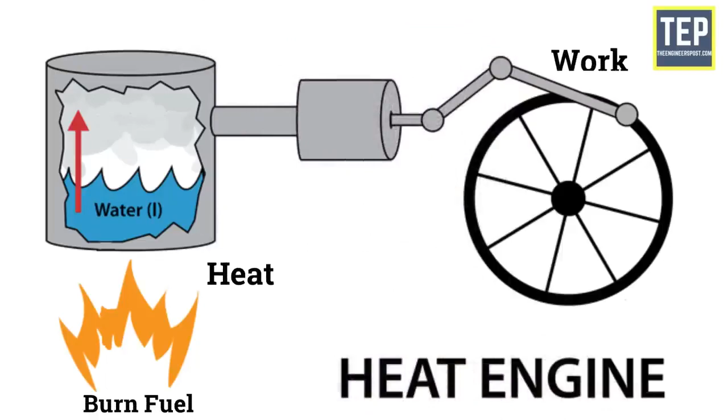An engine is a machine designed to convert one form of energy into mechanical energy. Heat engines burn fuel to create heat, which is then used to do work. It is a complex machine built to convert heat from burning gas into the force that turns the wheels.

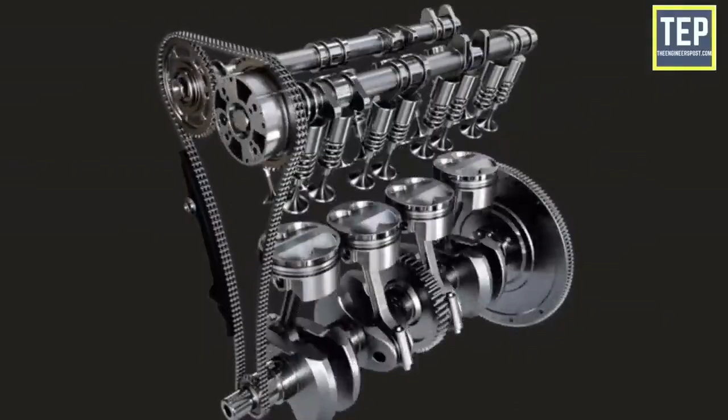The chain of reactions that achieve that objective is set in motion by a spark, which ignites a mixture of petrol vapor and compressed air inside a momentarily sealed cylinder and causes it to burn rapidly.

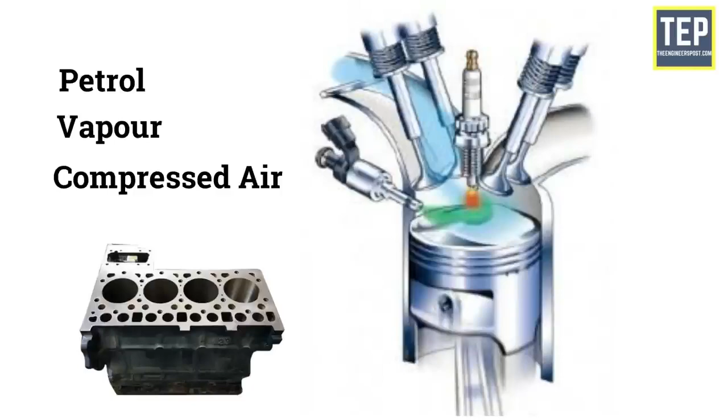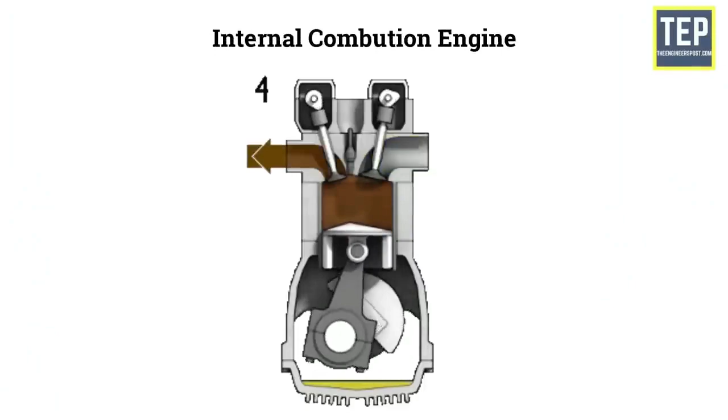The engine has two types: one is the internal combustion engine, and another is the external combustion engine. The internal combustion engine is a heat engine that burns its fuel inside the engine cylinder. External combustion engines are heat engines that burn their fuel outside the cylinder.

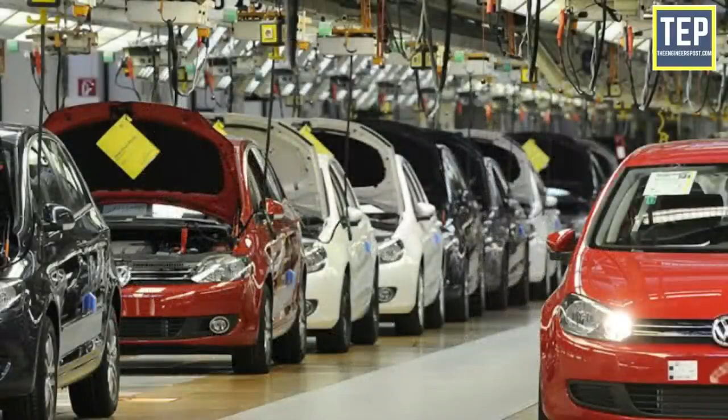The engine is one of the most essential parts of the automobile industry, or we can also say that the engine is the heart of an automobile.

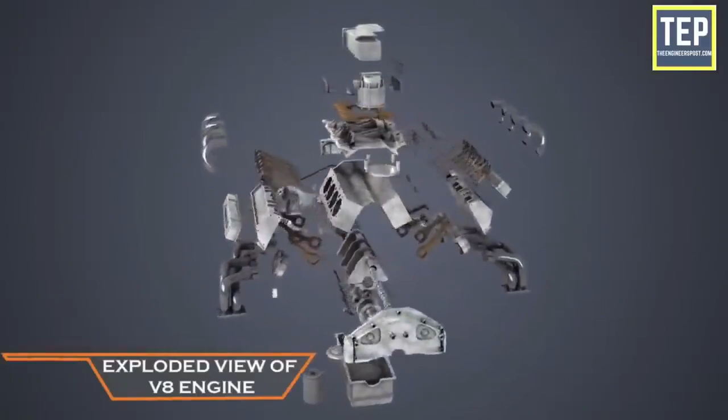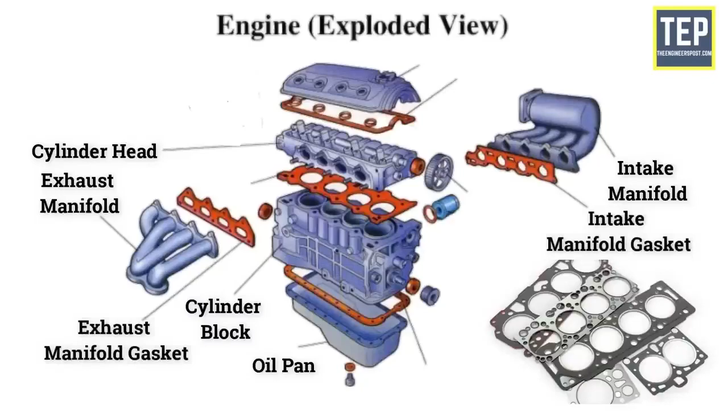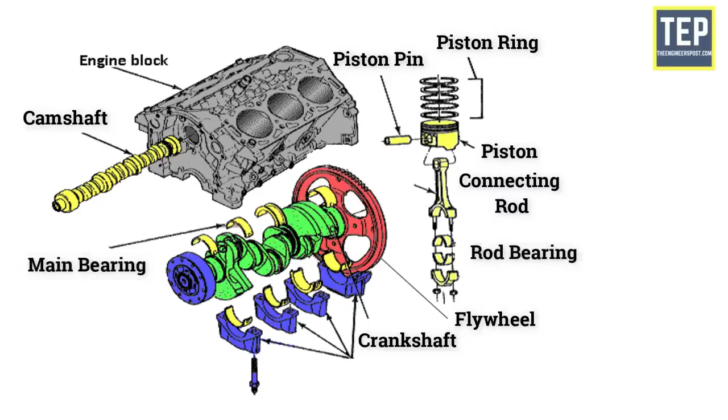The main parts of a car engine are cylinder block, cylinder head, oil pan, manifolds, gasket, and piston. A piston ring, piston pin, connecting rod, crankshaft, camshaft, flywheels, rod bearing, main bearings, and bearing caps.

Now let's take a look at each of the engine parts in detail, starting with the cylinder block. It is the basic framework for the engine and one of the main parts of an engine. A cylinder block consists of three parts: the cylinder in which the piston slides up and down, the port or opening for the valves, and the passages for the flow of cooling water.

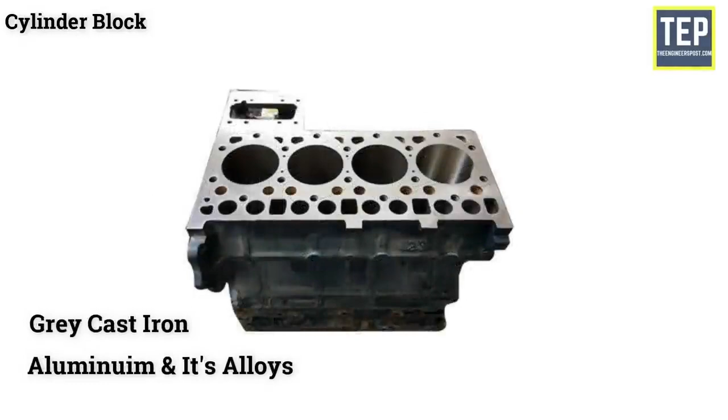The cylinder block is usually made of gray cast iron or aluminium and its alloys, while the crankcase is fixed to its bottom. Apart from these, other parts like timing gear, water pump, ignition distributor, flywheel, and fuel pump are also attached to it.

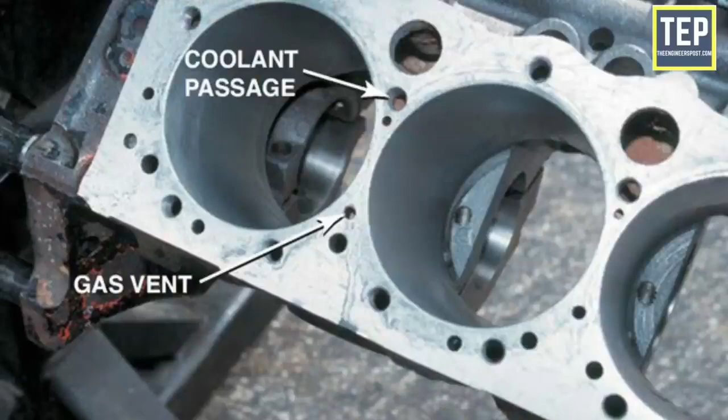Coolant passages are provided in the cylinder walls for the circulation of cooling water. The cylinder block also carries lubrication oil to various components through drilled passages that are called oil galleries.

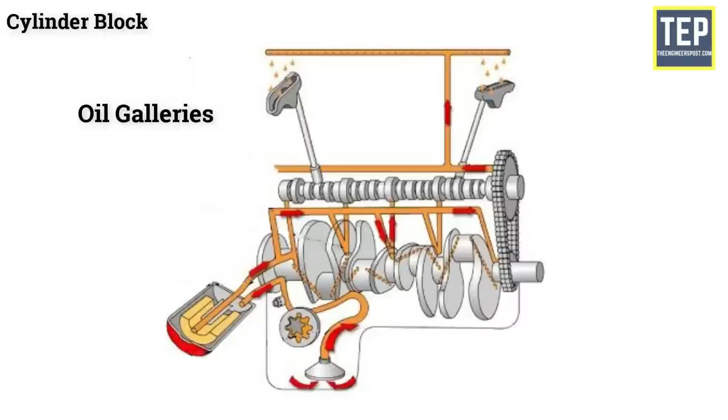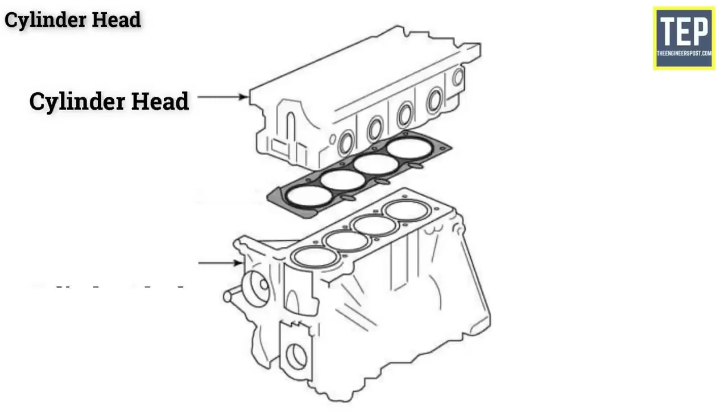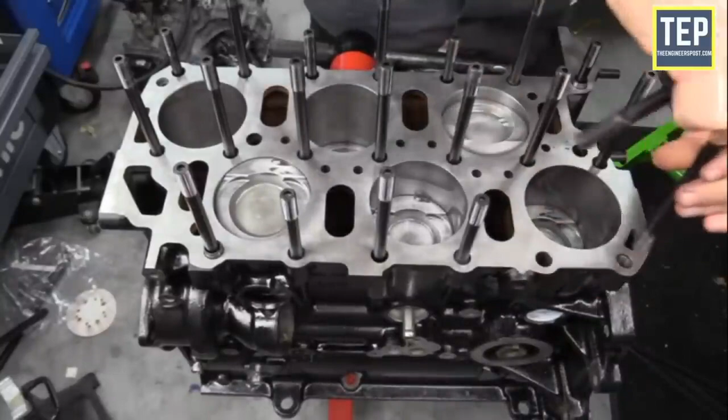The cylinder head is attached to the cylinder block using studs fixed to the block, with gaskets used to provide a tight leak-proof joint between the head and block.

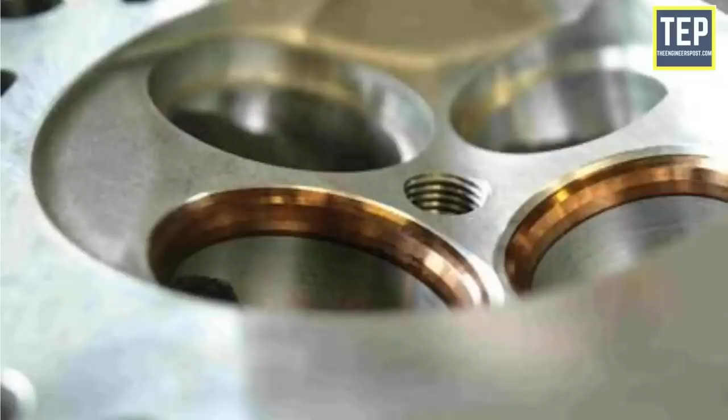The cylinder head contains a combustion chamber above each cylinder, and it also contains valve guides, valve seats, ports, coolant jackets, and threaded holes for spark plugs. It incorporates passages for the flow of cooling water.

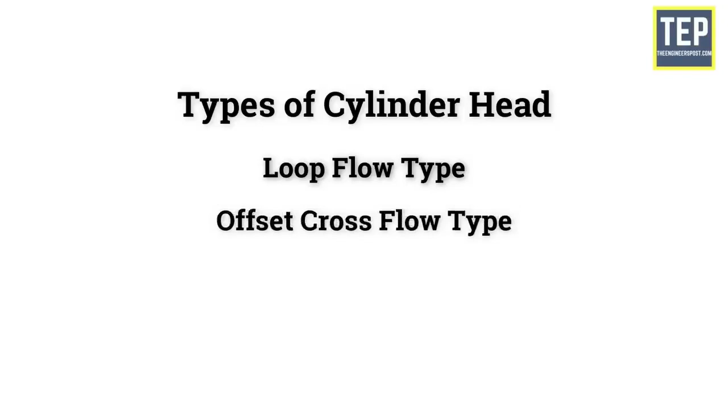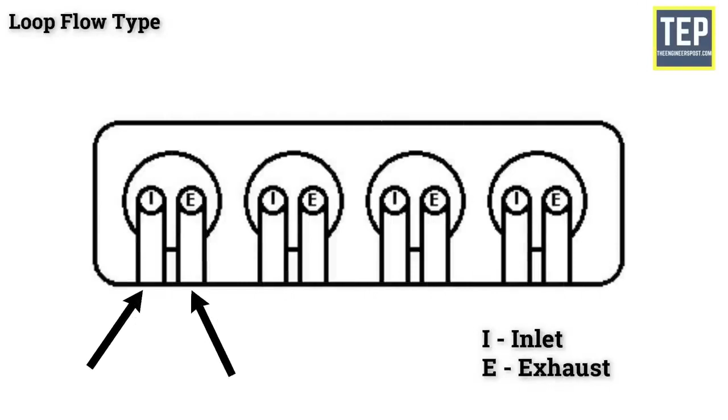There are three different types of cylinder head available, depending upon the valve and port layout: loop flow type, offset cross flow type, and inline cross flow type. In the loop flow type, the inlet and exhaust manifolds are on the same side, which facilitates preheating of the intake air. In the offset cross flow type, the inlet and exhaust manifolds are placed on different sides of the cylinder head.

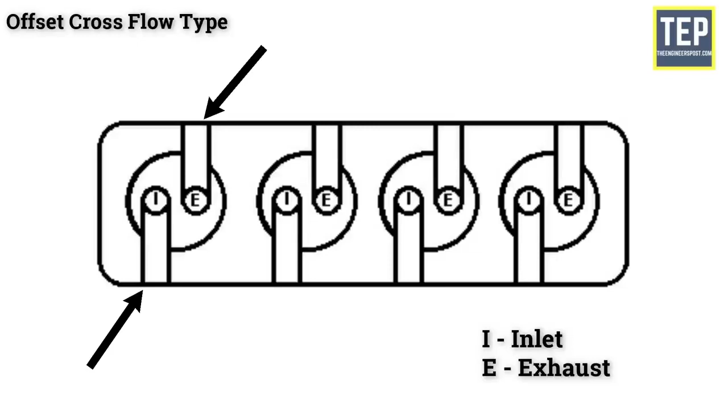In the inline cross-flow type, the valves are positioned transversely and usually inclined to each other, while the inlet and exhaust manifolds are on different sides of the cylinder head. This arrangement gives better performance, but it is costlier.

Crankcase. The oil pan and the lower part of the cylinder block together are called the crankcase. It is the bottom portion of the cylinder block in which the crankshaft is fitted.

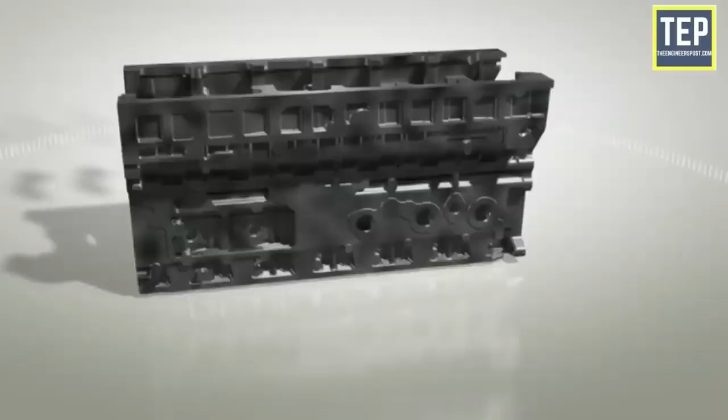This is a rigid construction made of gray cast iron or aluminium. It can either be cast integrally with the block, or cast separately and attached to the block with bolts. The crankcase is shaped simply like a box, having no bottom surface.

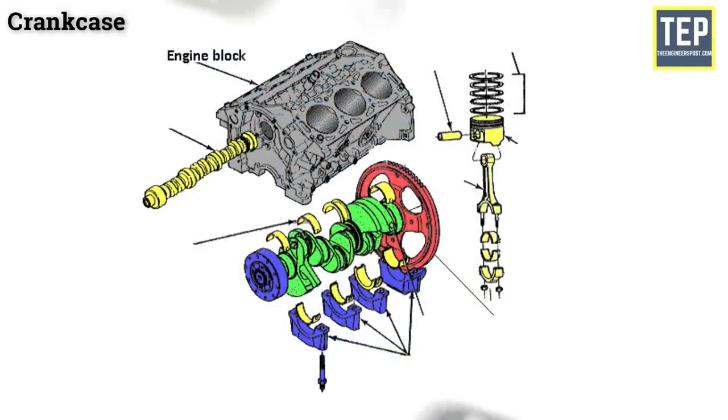The function of the crankcase is to provide support for the main journals and bearings of the crankshaft, rigidly maintaining the alignment of their axes of rotation under various engine loads.

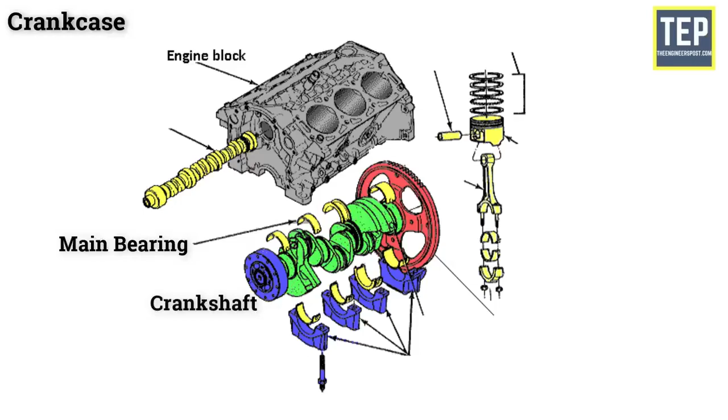Oil pan. The bottom half of the crankcase is called the oil pan or sump. It is attached to the crankcase through set screws and with a gasket to make the joint leak-proof.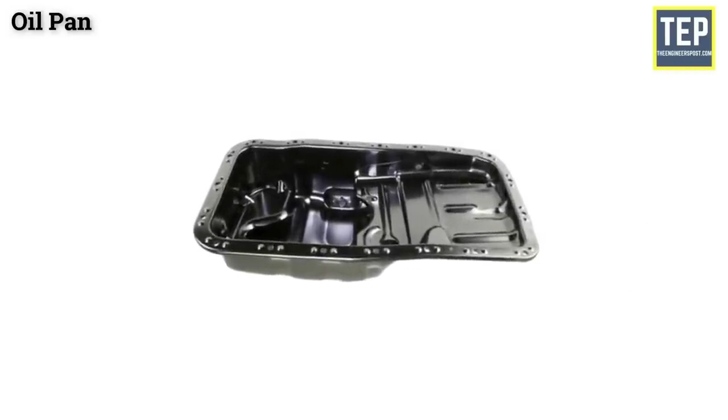The oil pan serves as a reservoir for the storage, cooling, and ventilation of engine lubricating oil. At the bottom of the oil sump, a drain plug is provided to drain out the dirty oil at the time of oil replacement. Generally, the sump is made of pressed steel sheet, or aluminium alloy casting is also used.

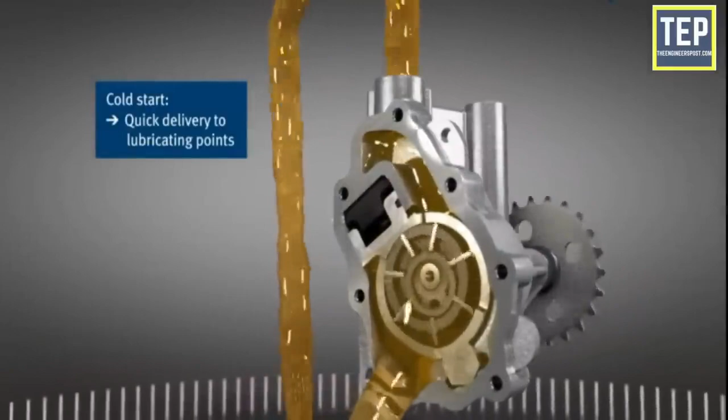The oil pump in the lubricating system draws oil from the oil pan and sends it to all working parts in the engine. The oil drains off and runs down into the pan. Thus, there is a constant circulation of oil between the pan and the working parts of the engine.

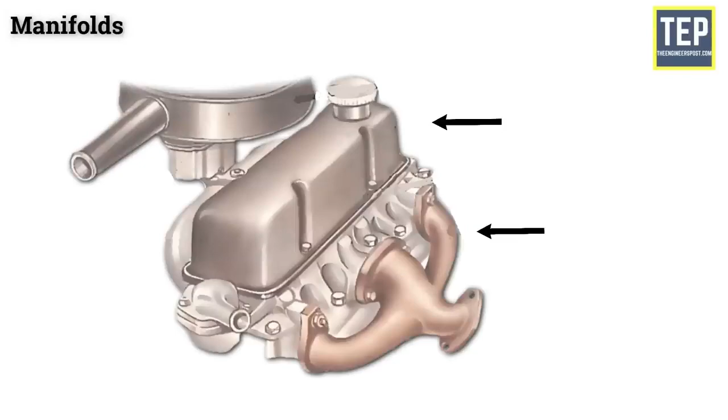Manifolds. There are separate sets of pipes attached to the cylinder head, which carries the air-fuel mixture and the exhaust gases. These are called manifolds. It is generally made of cast iron, so that it can withstand the high temperature of the exhaust gases.

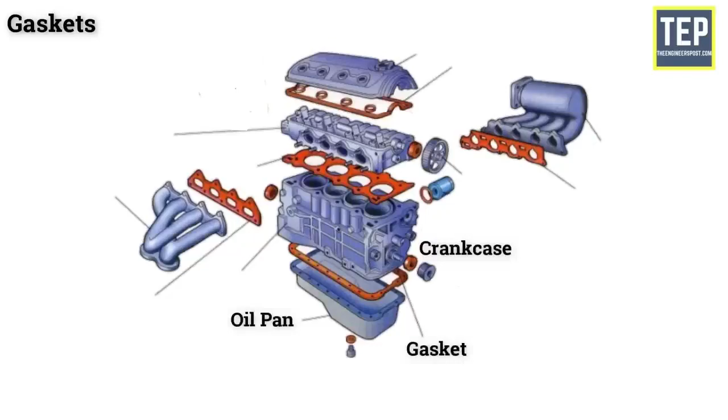Gaskets. Gaskets are used to provide a tight-fitting joint between two surfaces. Gaskets are found in the joint between the cylinder head and the cylinder block, between the crankcase and oil pan, and in between the cylinder block and manifold. Materials used for gaskets are cork, asbestos, rubber.

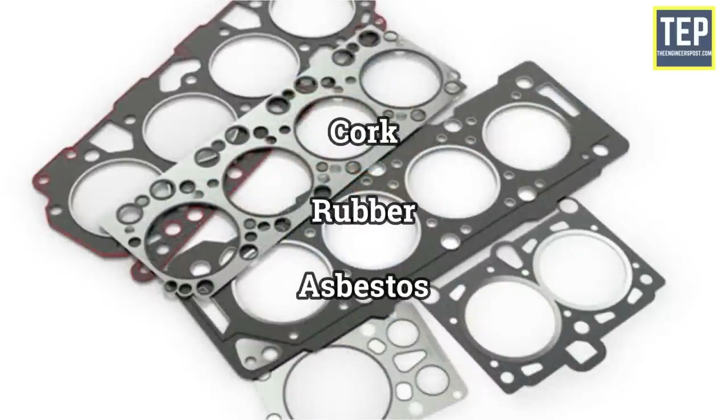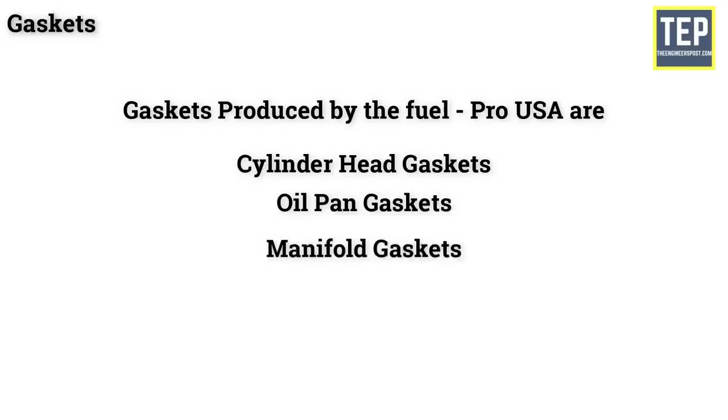Gaskets produced by the Fuel Pro USA are cylinder head gaskets, oil pan gaskets, manifold gaskets, and pump gaskets.

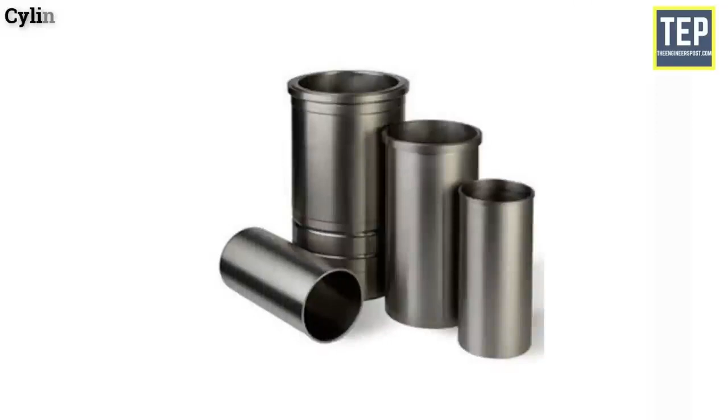Cylinder liners. The cylindrical shape liners are used to avoid the cylinder wear. It is one of the most important functional parts that make up the interior of an engine. Cylinder liners can be replaced after they are worn out.

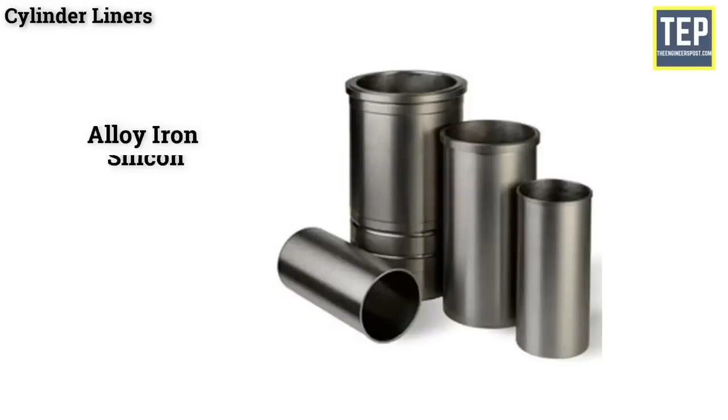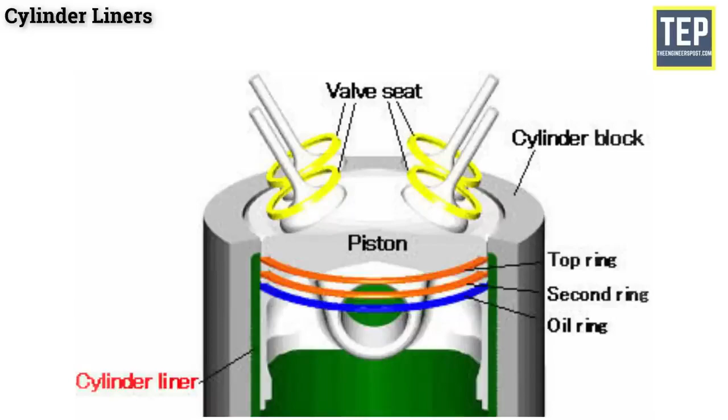These are made of special alloy iron, containing silicon, manganese, nickel, and chromium. Usually these are cast centrifugally. These liners resist wear and corrosion, and are the oil hardening type that offers considerably longer life for the engine. There are two types of cylinder liners available.

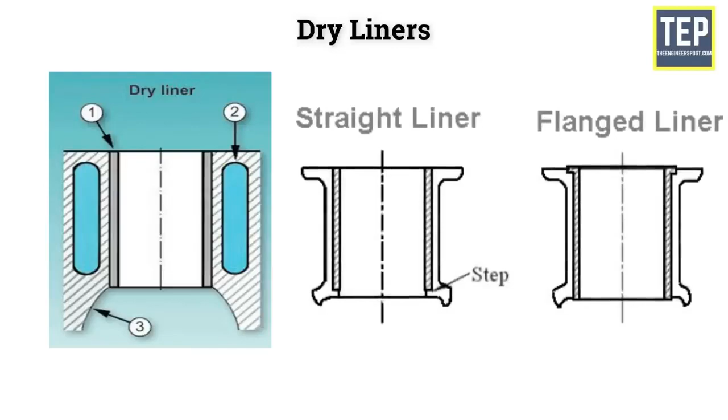They are dry liners and wet liners. Dry liner is made in the shape of a barrel with a flange at the top, which keeps it in position. The entire outer surface bears against the cylinder block casting, and hence, these are machined accurately at both outer and inner faces.

Wet liners will be in direct contact with the cooling water at their outer face. Because of this, these liners need not be machined very accurately at the outer surface. However, they have been machined accurately at the inner surface.

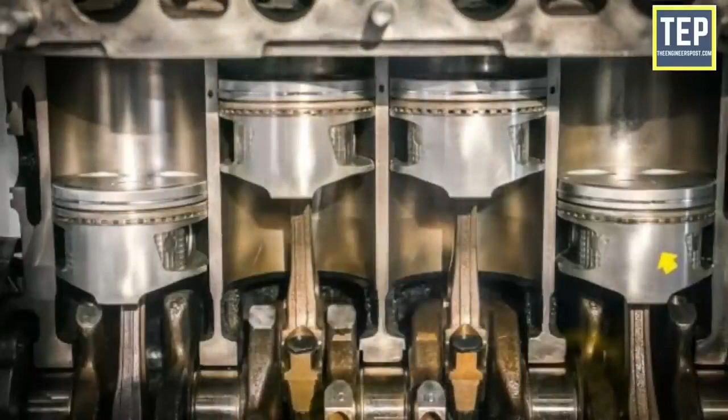Pistons. These are the most important engine parts compared to others. The piston is a cylindrical plug that moves up and down in the cylinder. It helps to convert pressure energy, obtained by the combustion of fuel, into useful mechanical power, and it transfers this power to the crankshaft through the connecting rod.

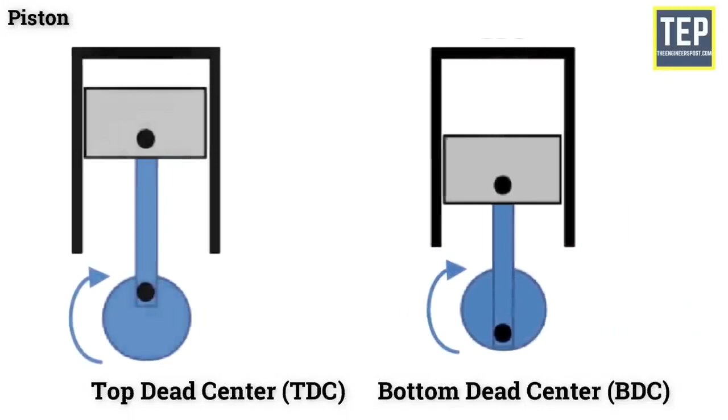The highest position the piston reaches in the cylinder is called the top dead center, and the lowest position it reaches is called the bottom dead center. It is provided with about 3 to 5 piston rings that provide a good seal between the cylinder wall and piston. The efficiency and economy of the engine primarily depend on the working of the piston.

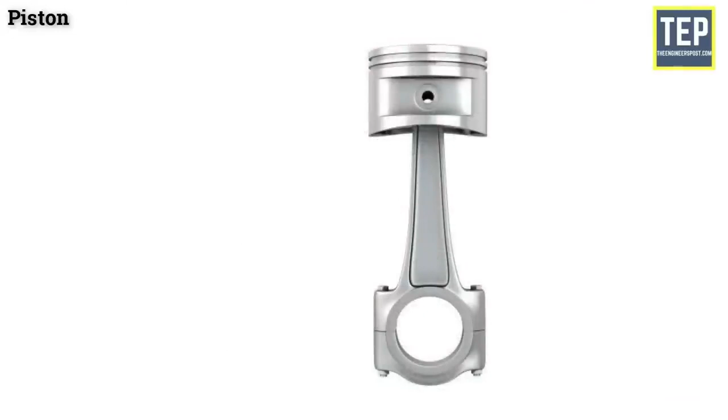The material used for the piston is mainly cast iron and aluminium alloy. It may be either cast or forged. The piston is usually smaller in diameter than the bore of the cylinder. The space between the piston and the cylinder wall is called the piston clearance.

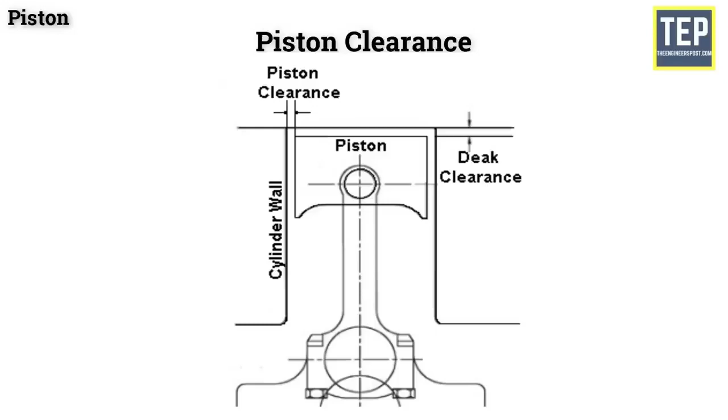This piston clearance provides a space for a layer of lubricant between the piston and cylinder wall to reduce friction. Generally, piston clearance is 0.025 mm to 0.100 mm.

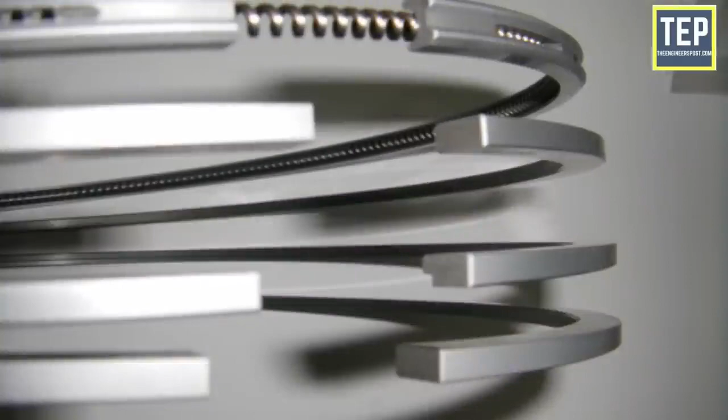Piston rings. The piston rings are fitted into the grooves of the piston to maintain a good seal between the piston and the cylinder wall. The function of piston rings is to form a seal against high-pressure gases from the combustion chamber entering into the crankcase.

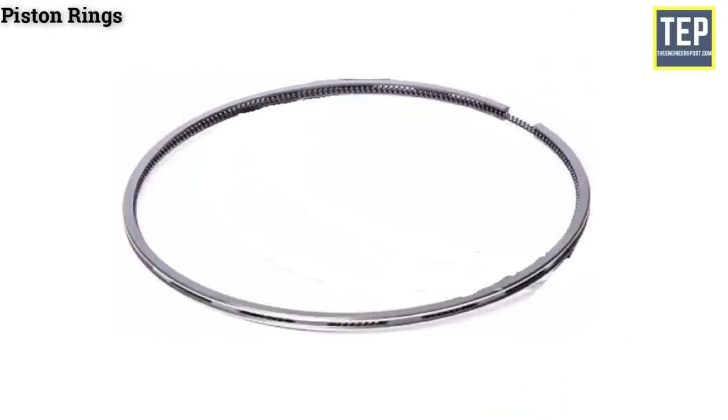The material generally used for piston rings is fine-grained alloy cast iron containing silicon and manganese. It has good heat and wear-resisting qualities.

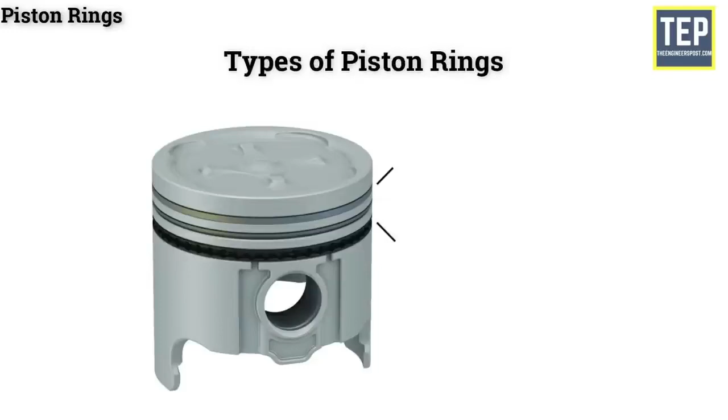Mainly there are two types of piston rings available. They are compression rings and oil control rings. The number of piston rings used is about 2 to 4 compression rings and 1 to 2 oil control rings.

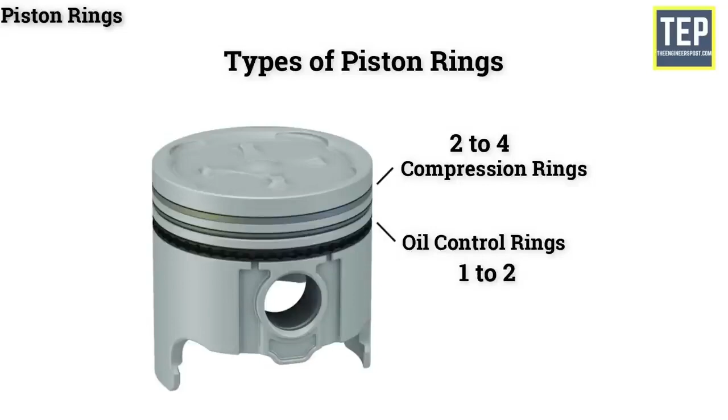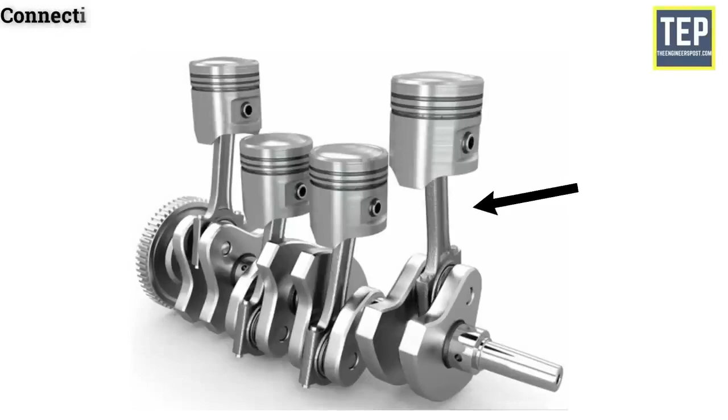Connecting rod. It is fitted in between the piston and crankshaft. The main function of the connecting rod is to convert the reciprocating motion of the piston into the rotary motion of the crankshaft.

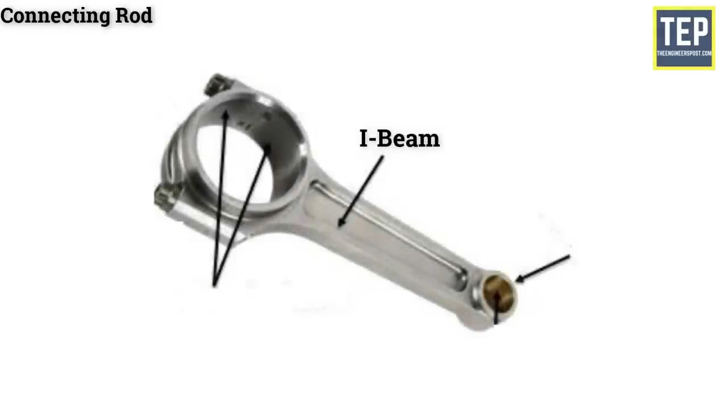The connecting rod in an IC engine must be light and strong enough to withstand stress and twisting forces. It usually has an I-beam cross-section and is made of alloy steel or duralumin by drop forging.

The small end of the connecting rod has either a solid eye, used to connect the piston, by the piston pin. The big end of the connecting rod is always split, and it is used to connect the crank pin of the crankshaft.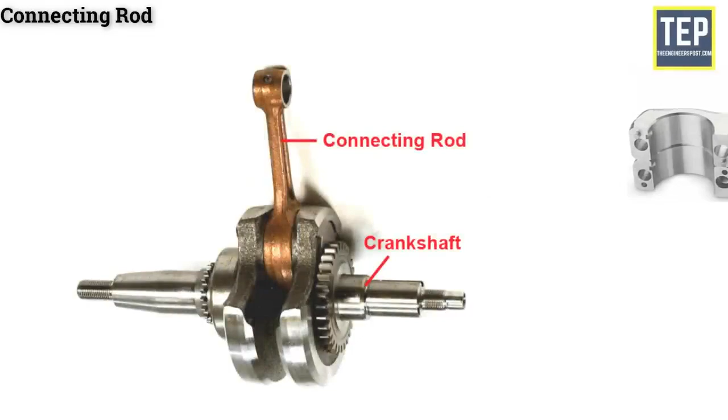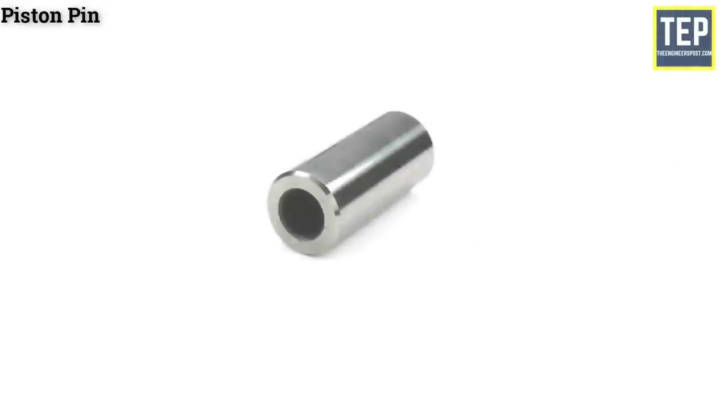Piston pin. The piston pin is also called wrist pin or gudgeon pin. It is used for connecting the small end of the connecting rod and the piston. It is made hollow to reduce weight and is made from case-hardened steel.

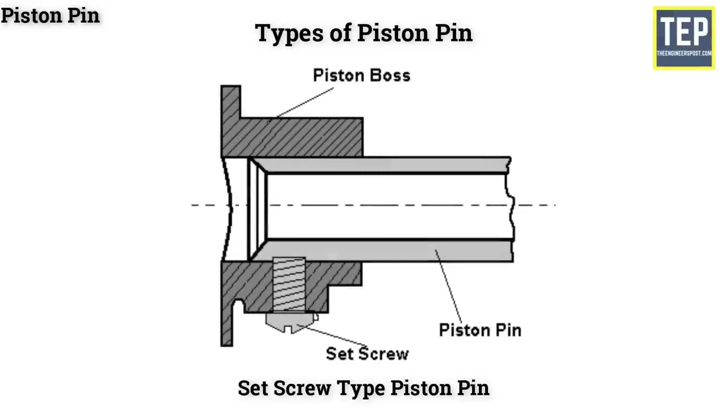Mainly there are 3 types of piston pins available. They are: set screw type piston pin, which is fastened to the piston by a set screw; and semi-floating piston pin, which is fastened to the connecting rod with a clamp screw.

Fully floating piston pin: the pin floats in both the piston bosses and the small end of the connecting rod. It is prevented from coming in contact with the cylinder wall by 2 circlips.

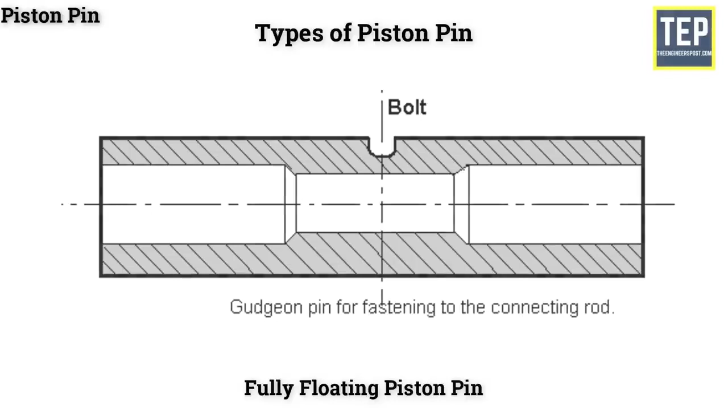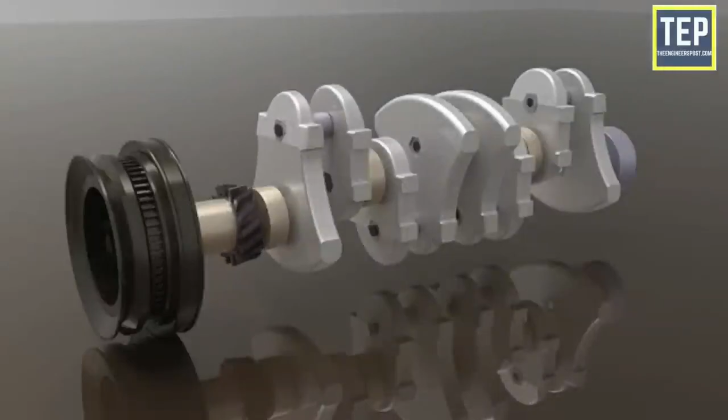Crankshaft. The crankshaft is the engine component from which the power is taken. It is one of the main power transmission sources in all engine parts. It is the first part of the power transmission system, in which the reciprocating motion of the piston is converted into rotating motion with the help of the connecting rod.

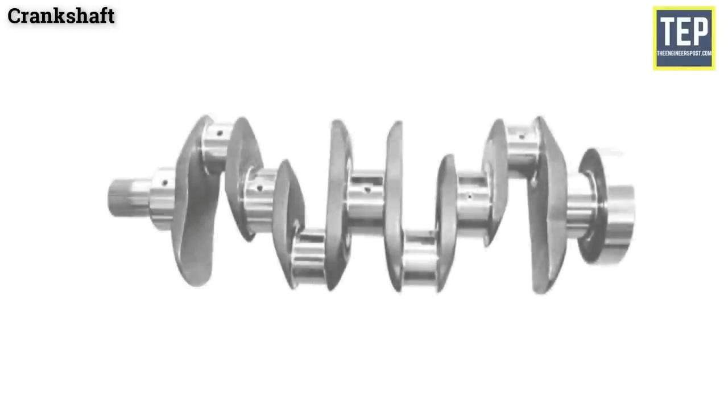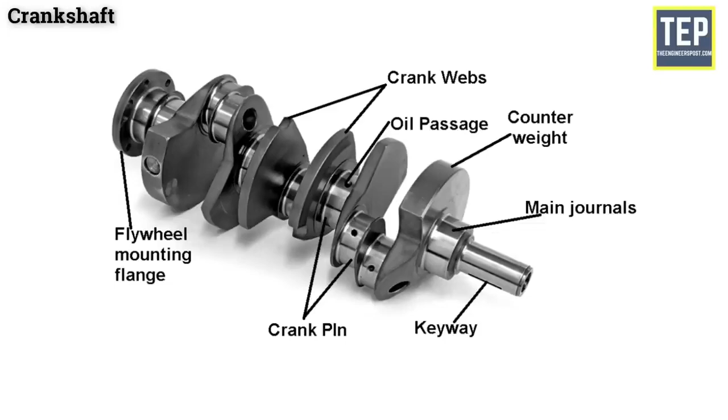The crankshaft is made of casting or forging of heat-treated alloy steel and is machined. A crankshaft consists of crank pins, webs, balancing weight, main journals, and oil holes.

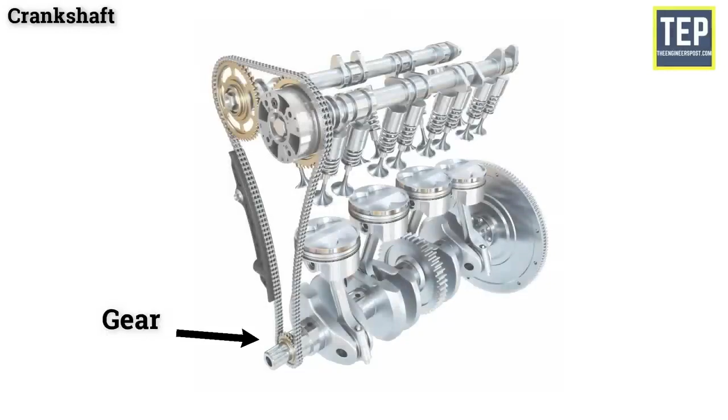The front end of the crankshaft carries 3 devices: a gear that drives the camshaft, the vibration damper to control torsional vibration, and the fan belt pulley. This pulley drives the engine fan, water pump, and generator with a V-belt.

The rear end of the crankshaft carries the flywheel. The flywheel tends to keep the crankshaft running at a constant speed.

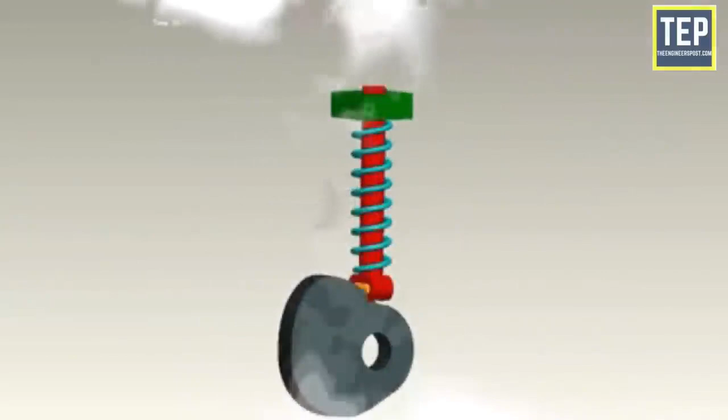Camshaft. A camshaft is a shaft on which cams are mounted. A cam is a device that changes the rotary motion of the camshaft into the linear motion of the follower. It is responsible for the opening of the valves. A camshaft has several cams along its length.

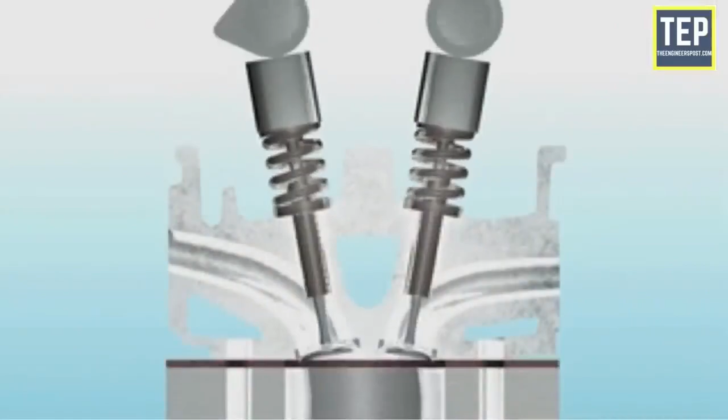The camshaft is driven by the crankshaft, and it has twice as many gear teeth as the gear on the crankshaft, so it turns at half the speed of the crankshaft. The camshaft is made from forged alloy steel.

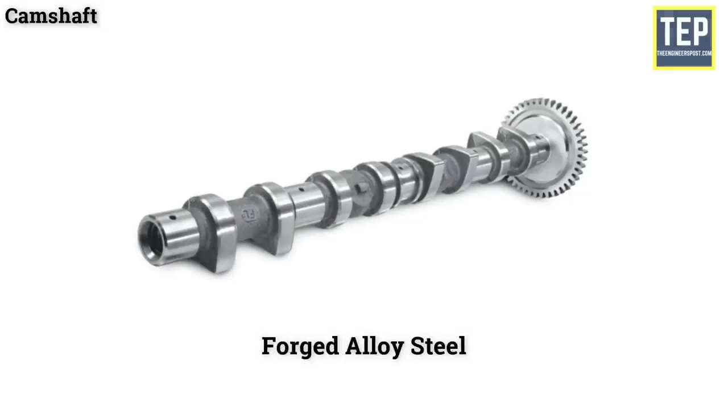There are 3 types of camshaft drive mechanisms: gear drive, chain drive, and belt drive.

Flywheel. The flywheel is used in the transmission system of a vehicle. A flywheel is a heavy steel wheel attached to the rear end of the crankshaft. The size of the flywheel depends upon the number of cylinders and the construction of the engine. The inertia of the flywheel tends to keep the crankshaft running at a constant speed.

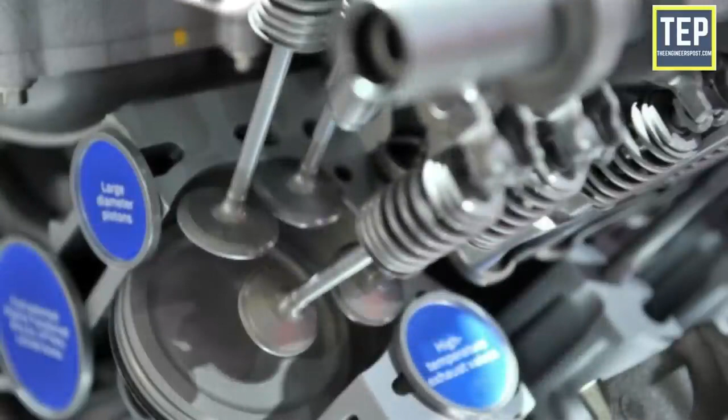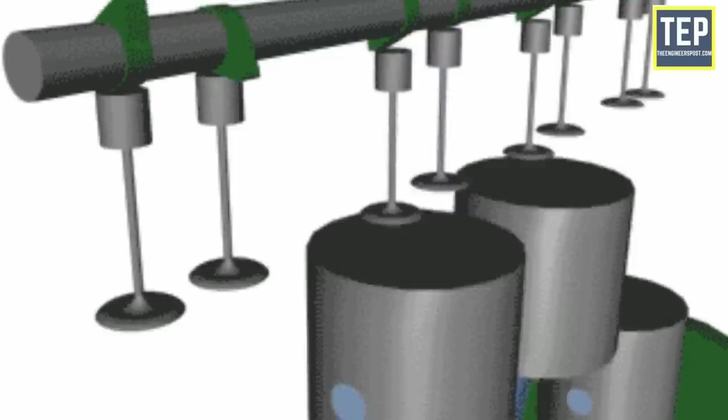Engine valves. These are essential to control the timing of air-fuel mixture entry into the cylinder and combustion products out of the cylinders. Engine valves are located at the inlet and outlet openings of the engine cylinder. The valves fit on the valve seats in their closed position.